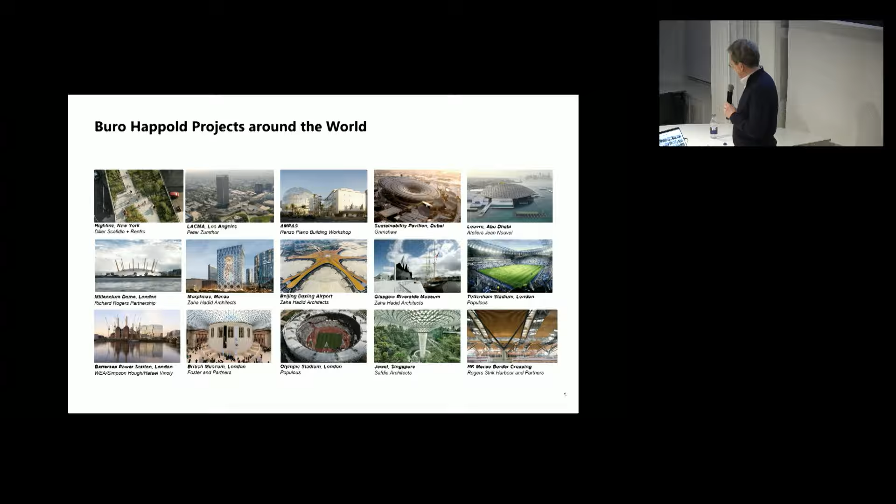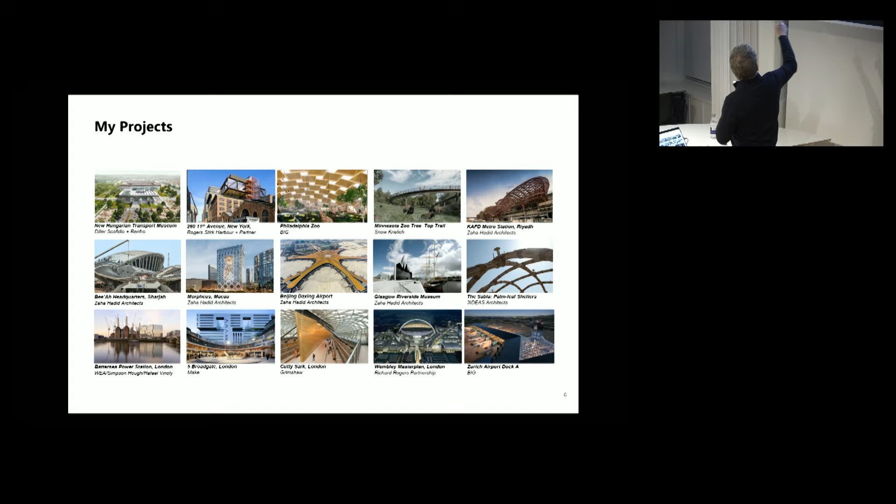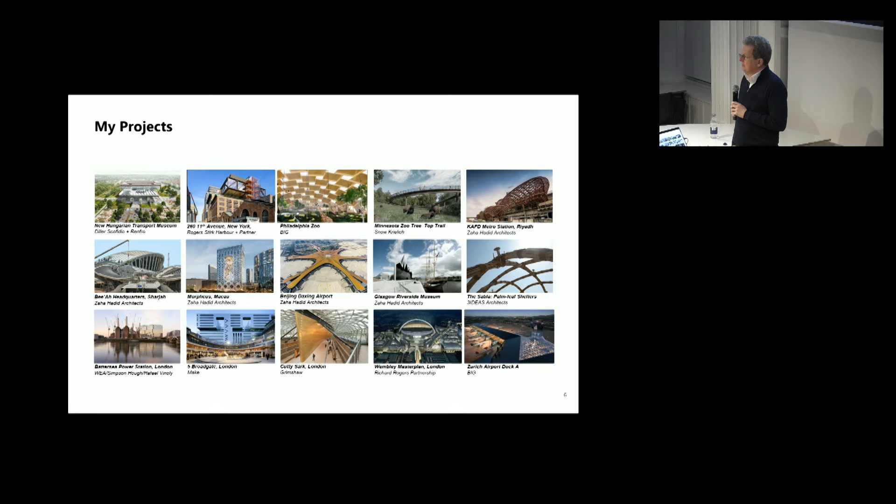We've left our footprint all over London. I've got a few pictures here. The British Museum over there, the Olympic Stadium, the Millennium Dome, and a few others. We've done pretty much every stadium here, Arsenal, Tottenham, for those who are interested in that sort of stuff. And some of those projects have also been mine. As a structural engineer, I've been working on the super complex stuff, many years with Zaha Hadid and her team all over the world. You can see here Morpheus and other things, a broad spectrum of things that have kept me always quite at the forefront of what's happening in engineering, where we're working with our clients and what's working and what's not working.

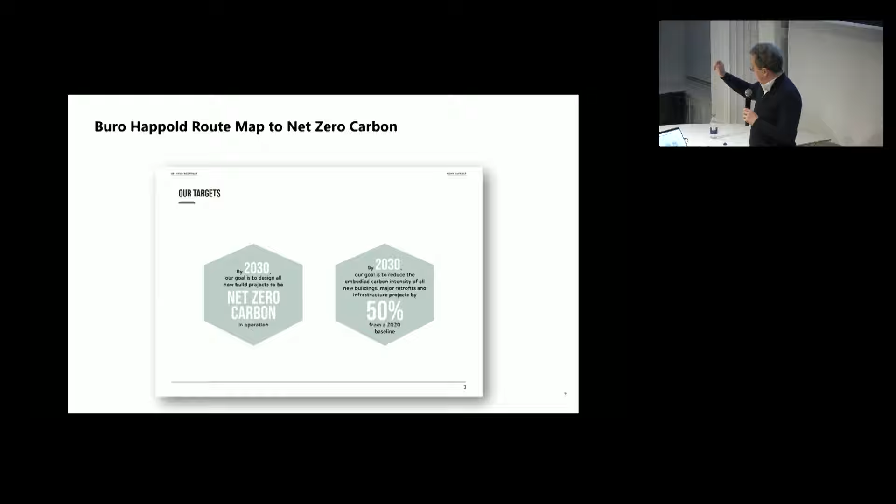But that was just really to position myself and our firm in this. What I really want to talk about is this whole big theme of climate emergency, climate change. And like all big design firms, you will have come across this across the world. We have our own targets around carbon emissions and sustainability. And our targets, you can see that here: 2030, all our projects to be net zero carbon. The interesting part here is also the net in the zero carbon.

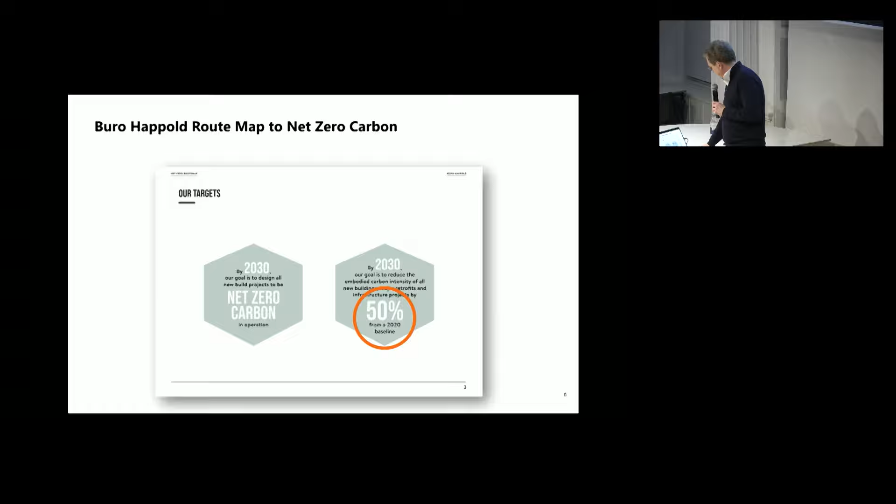But then the right-hand side, interesting here, 50% of the embodied carbon compared to baseline, because we do have a problem. And that problem in our industry, massively so, is materials. Materials, if you look at that, materials have embodied carbon and emissions throughout their entire life.

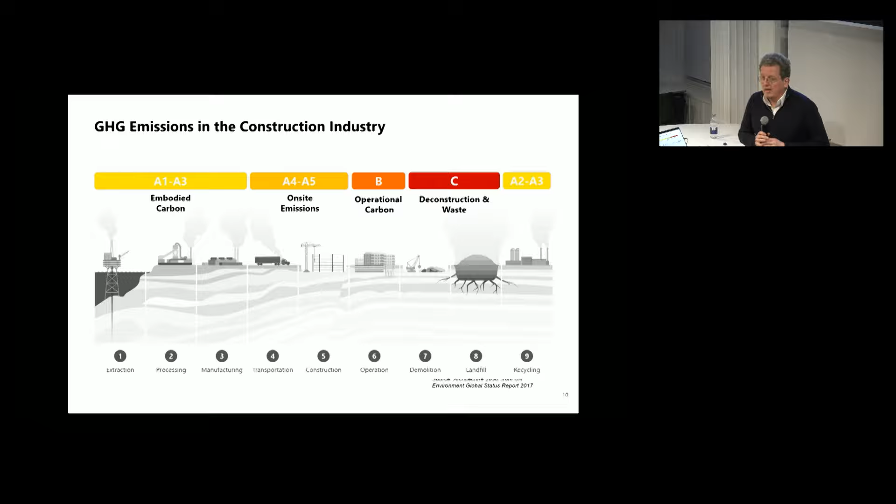We class this into these different steps, A1 to 5, B, C, and then the rest again, the recycling in the end if it happens. But at every stage, there are carbon emissions, and those carbon emissions are substantial. If you look at greenhouse gas emissions, to be more precise, in our sector, that's almost 40%. Building and using buildings, and I'm telling you nothing that you don't know yet. You have heard this all before, I'm pretty sure.

And if you then split this further, the big part here, 11, 12, 13%, numbers vary, are actually just materials and construction. So whatever we do has an enormous impact on the carbon balance or the greenhouse gas balance that we have. And over time, this has shifted. Over time, because we are able to reduce emissions in the running of our building through electrification, through green energy, and efficiency also in how we design our buildings for better operation.

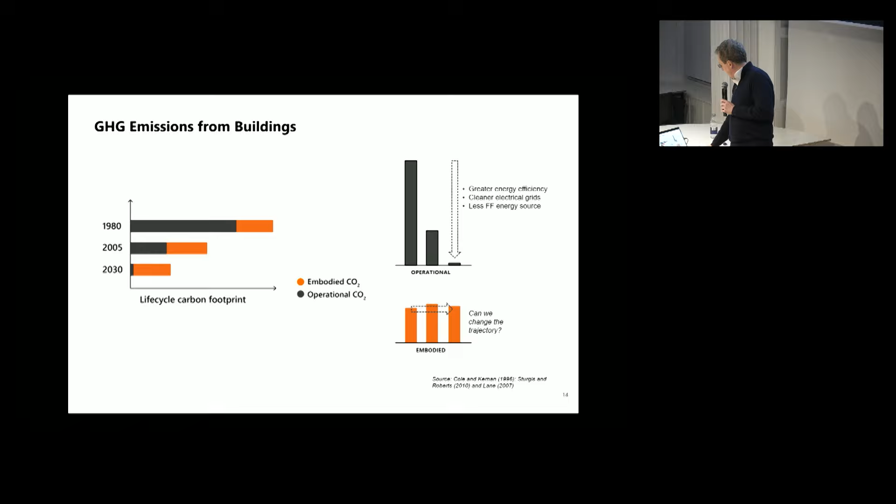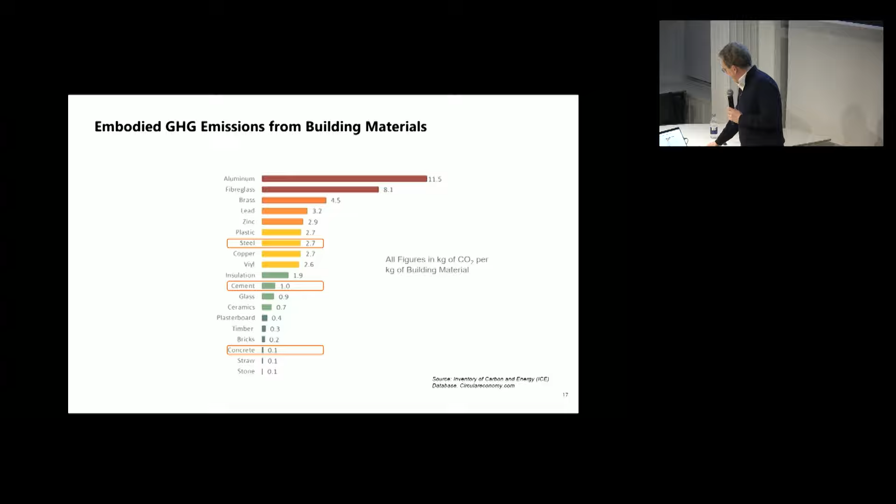If you look at just the standard materials we use all the time, steel, 2.7, concrete, cement, big number as well. But even timber, and I will show that in a moment, is not a zero carbon material. And so whatever we do, we have that problem of our materials being big carbon emitters. You've probably seen this, yeah? Most of it is to do with chemistry, not so much to do with energy.

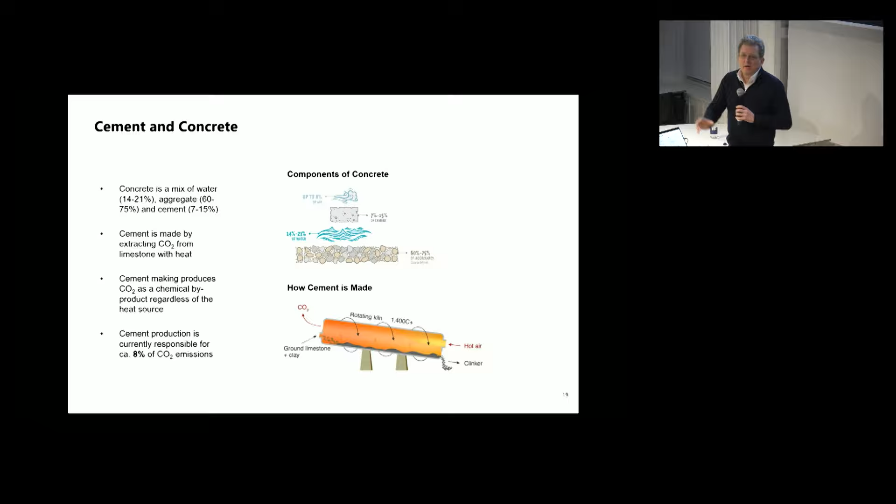So in the production of cement, we blast carbon dioxide out of limestone, and that gives us cement. Very simple terms. That happens at 1400 degrees, thereabouts, so not something that you can easily do with electric heating, so you have to gas fire it. And what you get out of this is the cement industry across the world is about 8% of global carbon emissions. Big chunk.

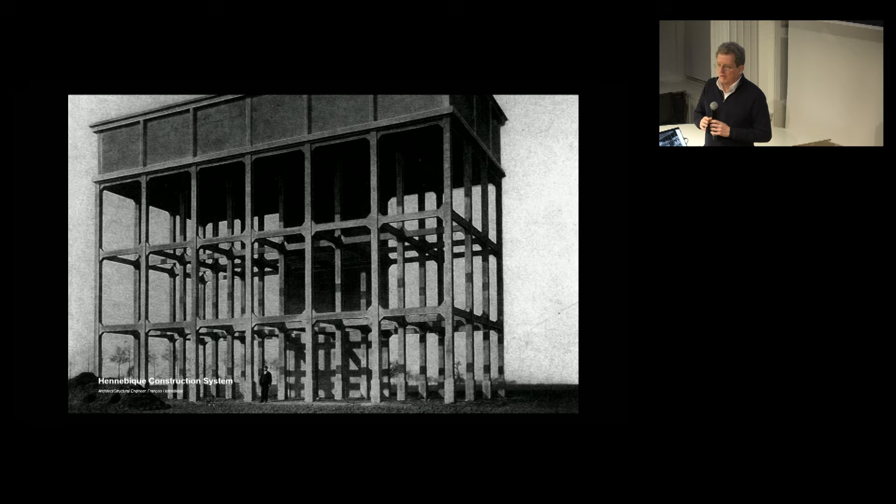But then cement as a material has been around for centuries, yeah? Concrete construction has its beginnings in the Pantheon in Rome, but then really took off at the beginning of the 20th century. This is Hennebique's structures in reinforced concrete, an entire typology, an entire tectonic logic developing out of concrete. And in a way, an absolutely fantastic material out of which you can build things that were previously not possible.

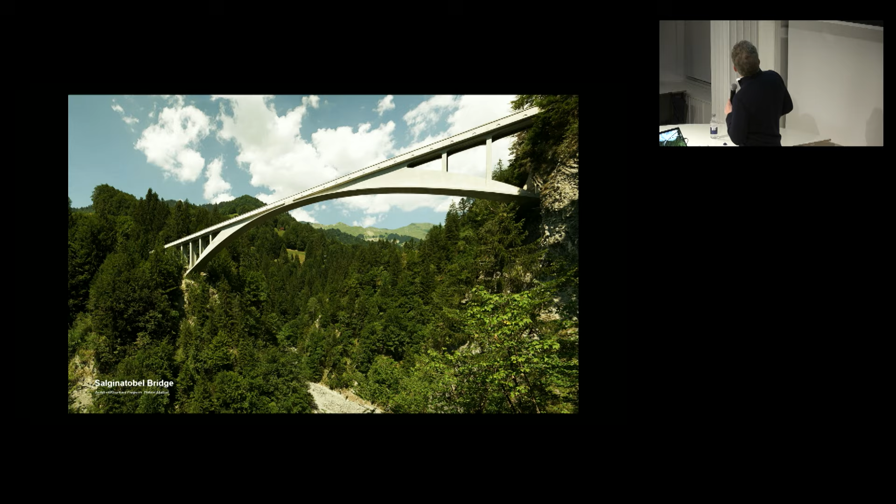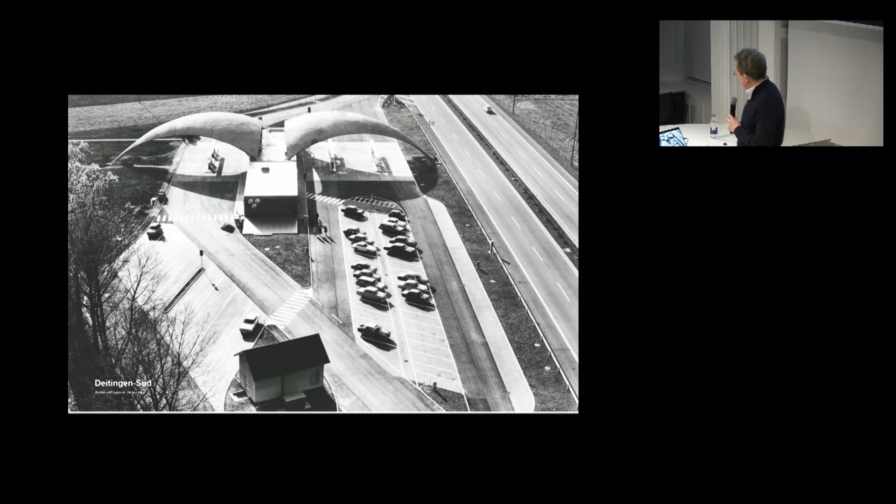And some masters of the use of that material emerged, like Robert Maillart, who knew exactly where to place material to get the optimum performance out of his bridges, and the aesthetics of those bridges matched their structural performance. And with that, a whole new aesthetic develops. Similarly, the structures of Heinz Isler or the Saarinen TWA terminal in New York. An entire aesthetic that was not possible before.

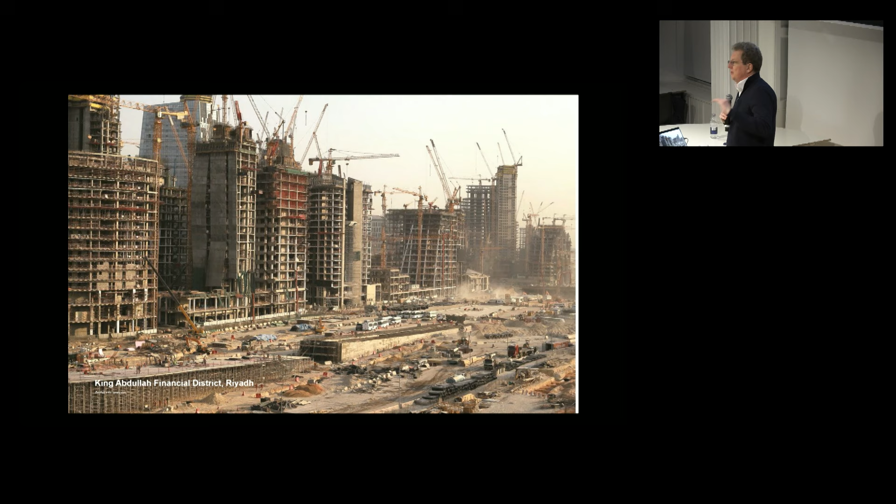Developing out of a material that is new and sparks off, I think that's my point here, an architectural quest for new form, creativity, and a look into a future of architecture that is quite different from what was there before. Needless to say, the primary use of concrete is this, enormous amounts just going into slabs being stacked, and that is the big issue, right? Huge volumes everywhere in the world.

We have a similar story with iron and steel, because there again, it's primarily a chemical issue. The chemistry of making iron is ripping oxygen out of ferrous oxide, and that is best done with carbon monoxide. You take that carbon monoxide and you let it react with the iron ore, and what you get is raw iron. In very, very simplistic terms. I'm not going to bore you with all the intricacies of the chemistry here, but that process needs a lot of heat and a lot of coal.

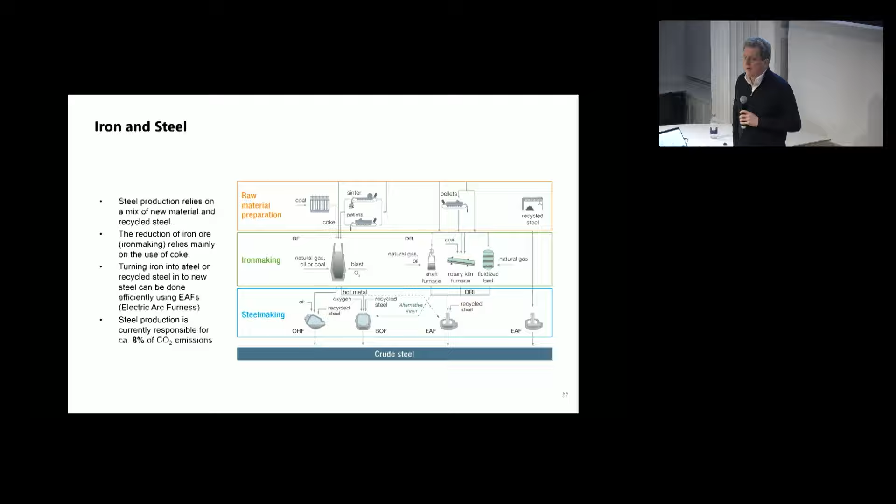There's some hope though, because you can make this process work with hydrogen. You could potentially, and there's tests that are running with this, do the reduction reaction, where you get the oxygen out of the ferrous oxide, with highly reactive hydrogen. But that only works properly if that hydrogen is produced in a sustainable manner. Because hydrogen, as we can buy it normally, is just taken from methane, where you take the CO2 out and you're left with the hydrogen, so you're not really getting anywhere.

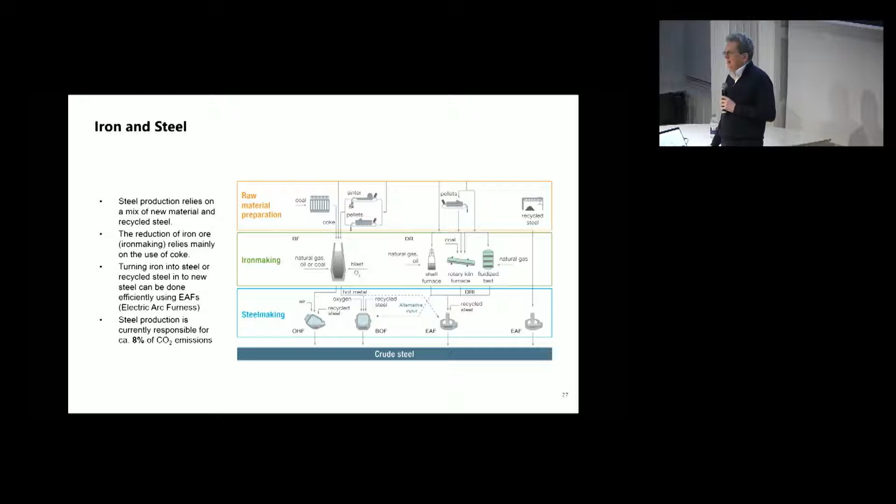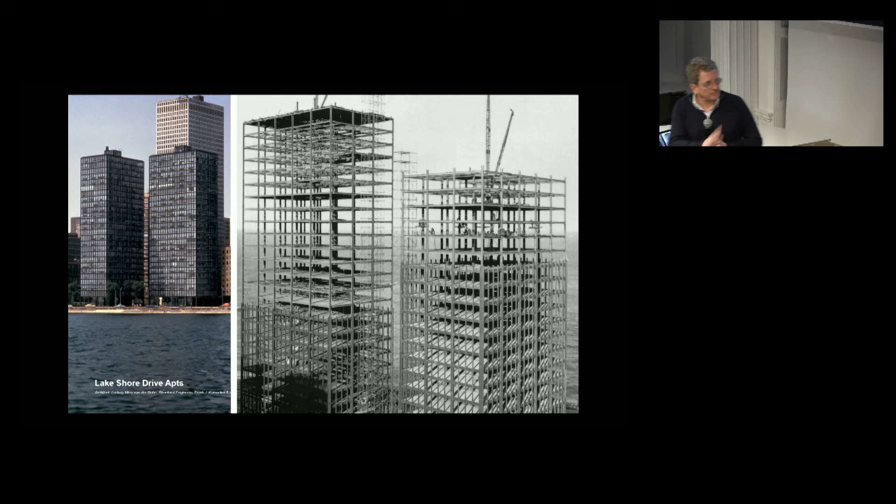And in all of this, the story is very similar. Steel is obviously not just construction. Cement is primarily construction, and is equally about 8% of global carbon emissions. But a similar story here: out of steel, out of the invention and research into the use of a new material, an entirely new architecture, an entirely new opportunity to build bigger, to build more ambitiously developed, which is quite fascinating. Here, 19th century, Frankfurt Station, or the extremely delicate structures of Mies van der Rohe's Lake Shore Drive apartments, or one of ours here down the road, the Millennium Dome.

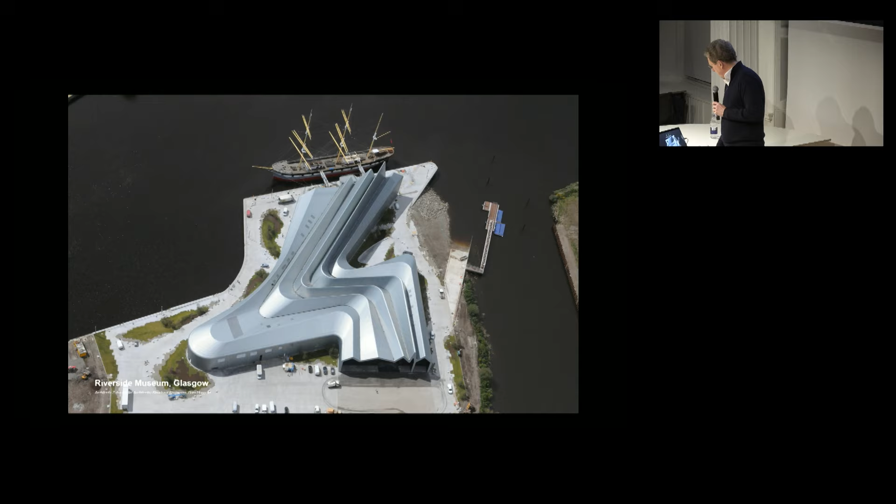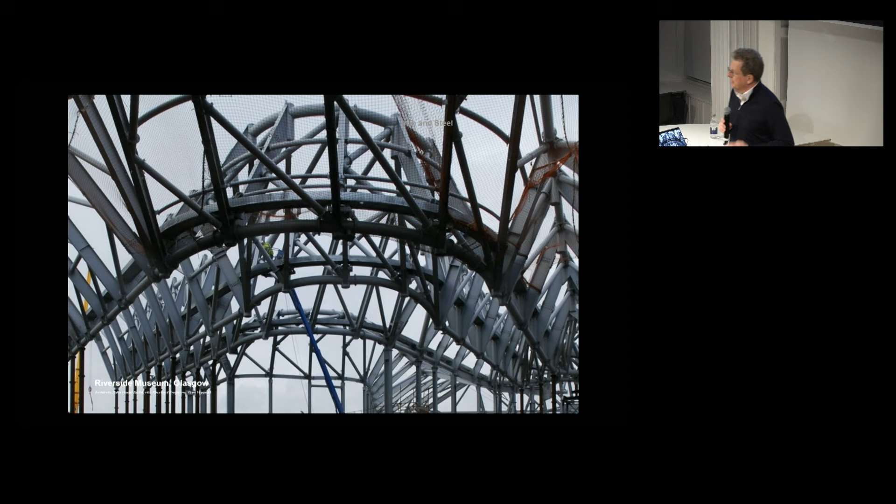Perfect example of what you can do if you master using a material. This is entirely built from steel, with the exception of the membrane, which is a glass fiber material. Or then this, one of mine, Zaha Hadid's Glasgow Riverside Museum. We use steel to create the most unbelievable form, because it is a fantastic material for this kind of thing. But then it comes at that cost that I just mentioned.

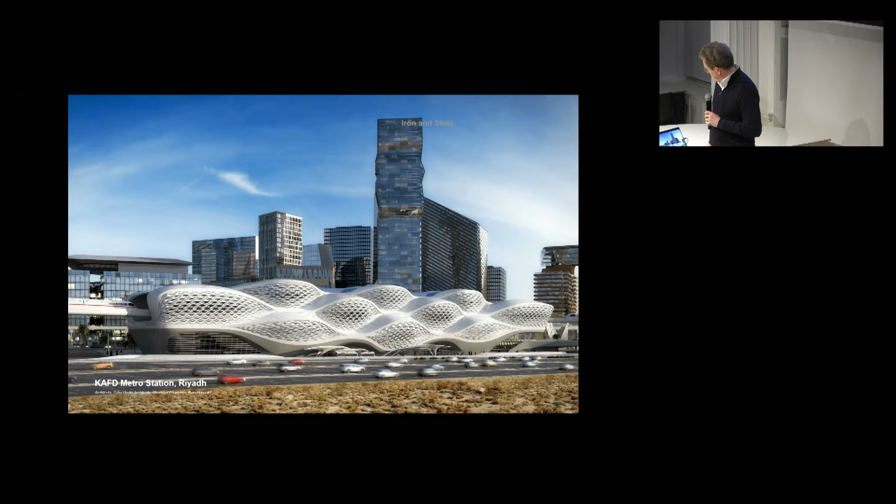Similarly, this, another one of mine, KAFD metro station, opened last year. That's what it looks like. That's how you create this form. And we need to ask ourselves, is this where it should go? Is this the way to use what I would say is a precious material? Precious not because it's so expensive in money terms, but because it's so expensive in emission terms.

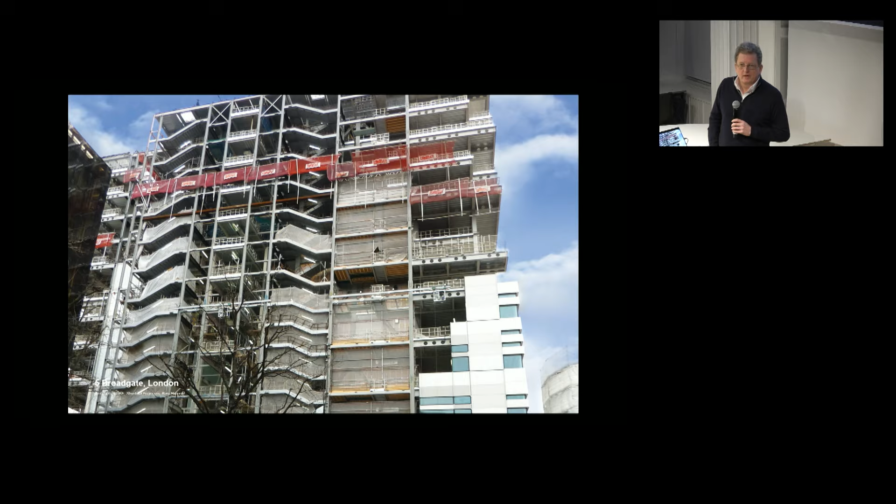And again, similar to concrete, in another one of mine here steelwork is used primarily to put floor plates one on top of the other. Big spans are possible with steelwork beams. We see that everywhere in the city. This was an interesting one, that project that I just showed you, because it was completed in 2012.

But in the run-up to this thing, between 2009 and 2012, we did a full carbon life cycle assessment. I had a guy in my office who had an absolute passion for this. He dug into all the early databases that he could find, getting these numbers that are now widely published everywhere, and did all this meticulously. British Land, the client that we worked with at the time, paid for us. They showed great foresight with this.

And then as the project was complete, I went to see their sustainability director and asked her whether we shouldn't do this on all projects, because we could actually demonstrate we could save some embodied carbon through clever interventions, the right design of the foundations or the right cladding material and so forth. And she said to me that was a bit of a non-story. No one's interested. Why would we do that? Well, fast forward 15, 20 years, and it is just the story. It's everywhere.

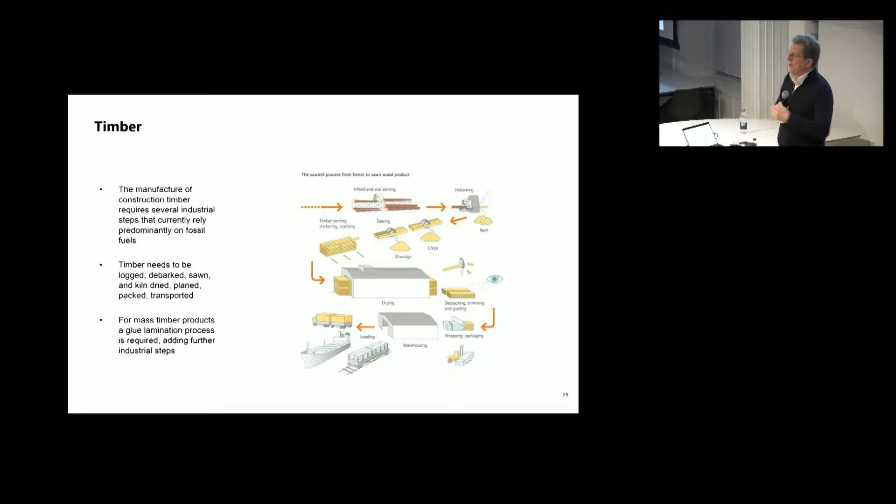And timber, I need to put in there as well as a material. I said it's not zero carbon, because even though timber is made from trees that grow by taking carbon out of the air and turning it into the fibrous material that is timber, what we're doing with it isn't really taking the tree and making it into a building. We're turning it into an industrial product. There's an enormous amount of cutting, kiln drying, preparing, gluing, and turning it into what is ultimately an industrial building material that has its own carbon impact. Much lower than steel or concrete, but still not the sort of zero carbon wonder material.

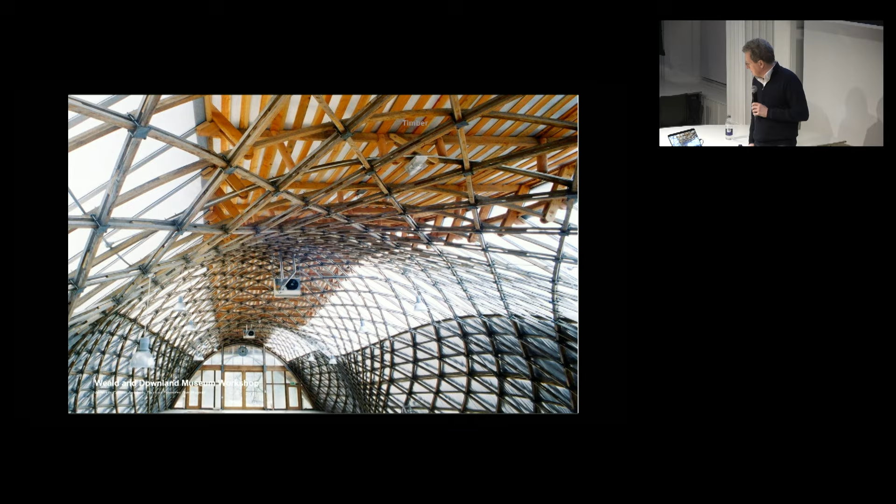And even with timber as an industrial material, fantastic architectural and structural forms emerged. This is one of those that really fascinates me. We were just talking about timber grid shells on the way over, because I went to a conference not so long ago, and there was lots of work being shown about tiny little timber grid shells, and I said, have a look at those, we built them years ago. Fascinating structures. But as you can see from this project, in most cases we turn timber into industrial building products. They are glue-laminated sections connected with steelwork connectors or something similar that create their own aesthetic, their own architectural expression, but are highly technical.

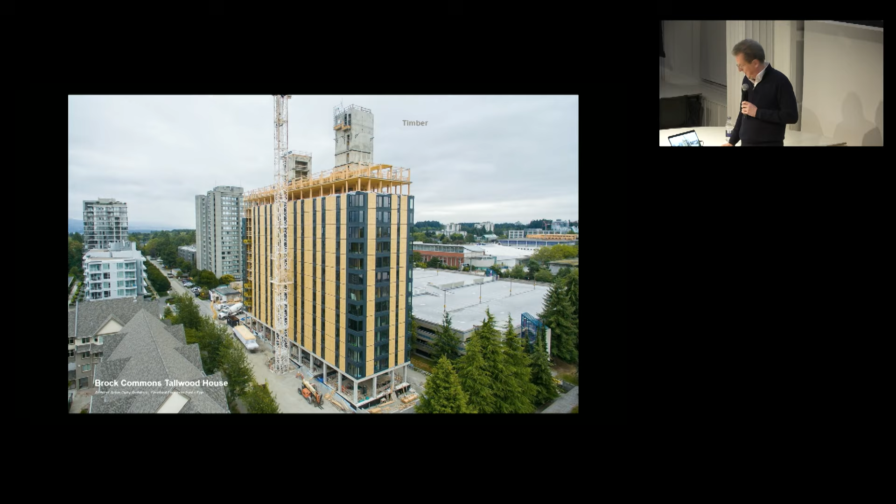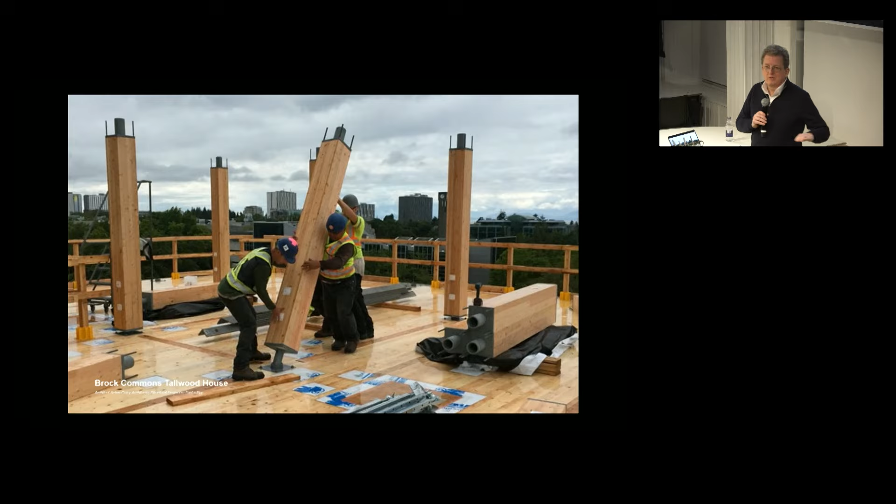And then the quest to turn timber, similar to steel and concrete, into a material that is easy to use for the development of multi-story buildings. Yeah, this one is a fascinating one. It's now a few years old, but it's literally using glue-laminated, cross-laminated timber. It's not one of ours, it's Fast + Epp, structural engineers for this, turning that into a material that can produce flat slabs. That is where we want to land, flat slabs on columns.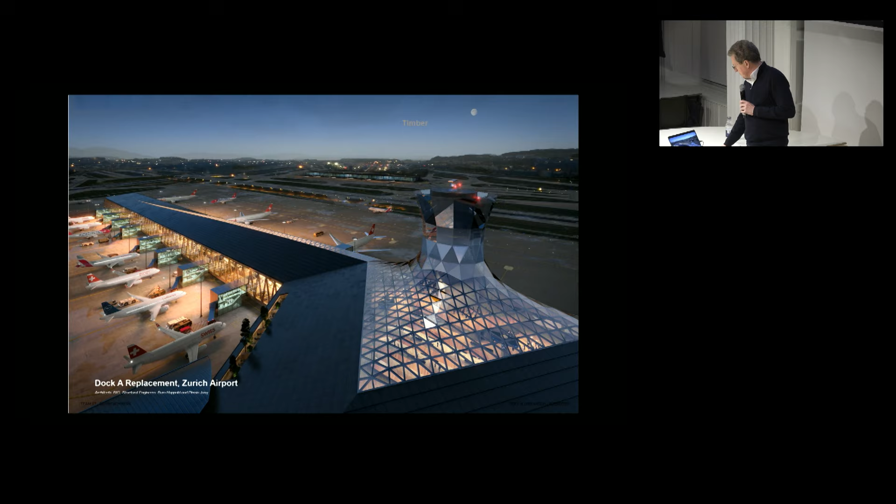And a recent one where timber is then taken to the sort of end game, basically. Make it as big as you can. Well, pardon the pun, it's with BIG architects. It is the new Dock A of Zurich Airport, an enormous timber structure. The entire building sits on a concrete plinth, but is then made from big laminated timber elements.

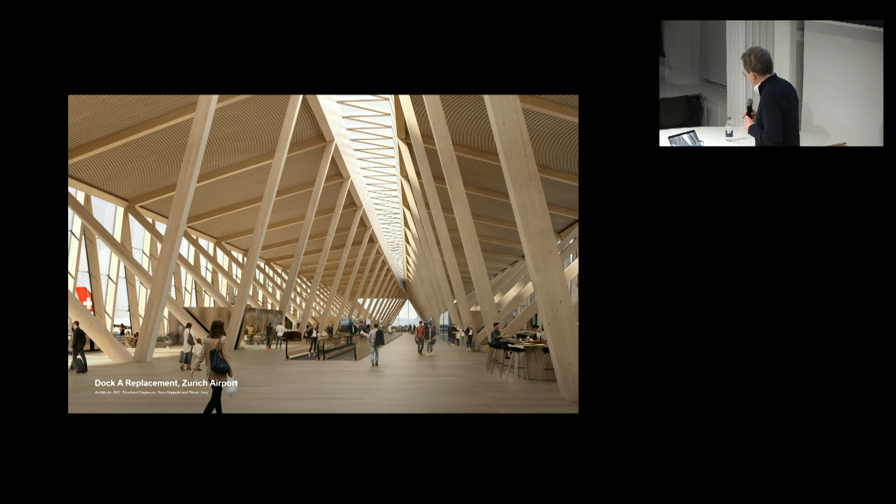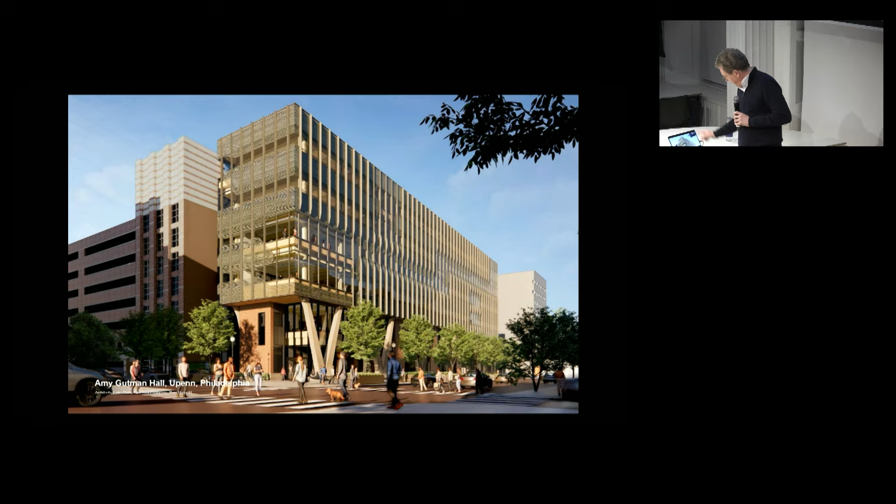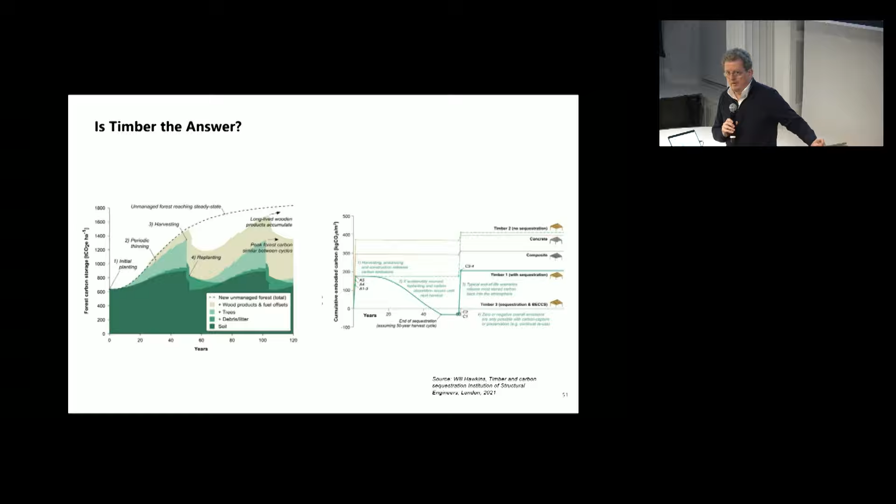But before we do, this is a study that one of my colleagues did, that we need to be absolutely mindful of if we build with timber, because it's the end of life that is critical here. If at the end of life we throw the timber into the landfill, then all the carbon that has been sequestered, pulled out of the air, is going to be put back into the atmosphere. And so timber can actually become quite a carbon-intensive material if we don't look at the entire life cycle, which is then a design challenge, because we don't want to throw our buildings away after 30 years or 50 years or whenever it is.

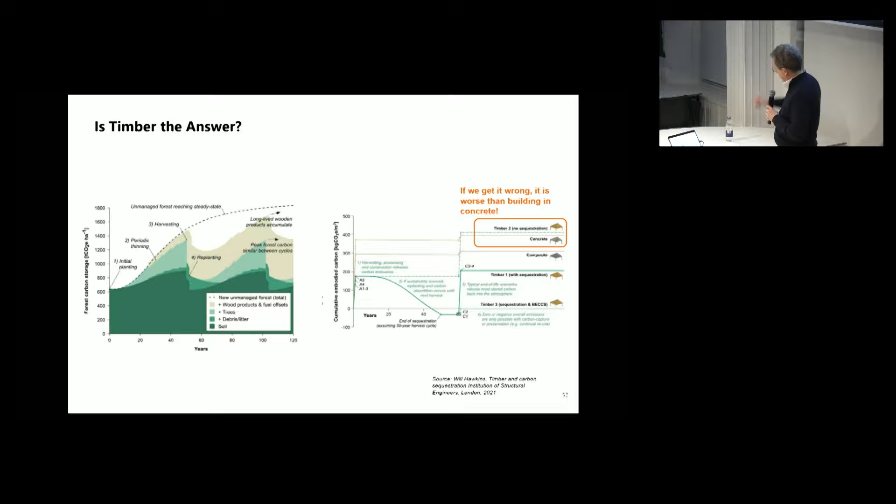This one here has been around for a while. But 5 Broadgate that I showed you earlier, the one where we did the embodied carbon analysis, for which we actually won a sustainability prize, it replaced 2 perfectly good buildings. They were just a little too small. So yes, here you can see how if you get it wrong, it's worse than building with concrete.

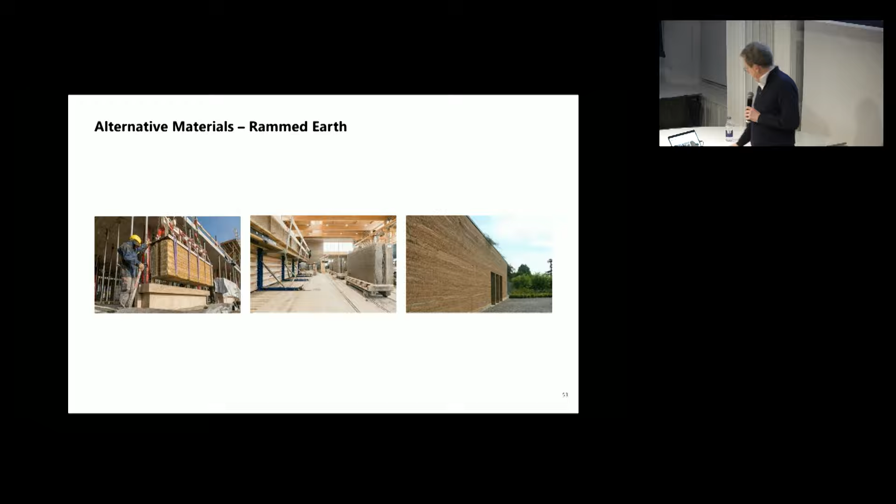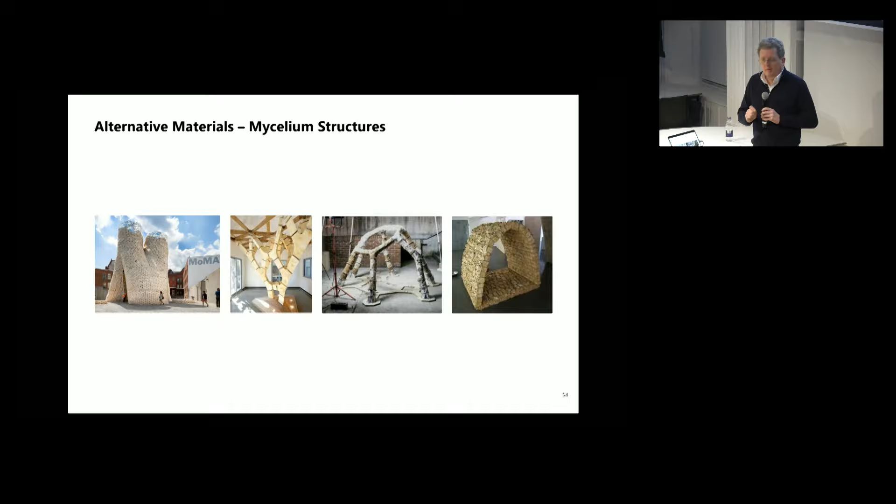And then one of those areas that I'm looking at with my students: what are the alternatives? Can we build with rammed earth? Can we actually do something that is as ambitious architecturally and as ambitious structurally if we build with rammed earth, or if we build with mushrooms? Not quite. We're not quite there yet. And that is where I'm saying we have a big problem. So we need to rethink how we design and how we build and what we build.

Everyone in our industry is talking about a whole life carbon vision. This is the UK Green Building Council. Everybody knows that this is a problem that we need to be engaging with. A whole lot of targets have been set, a whole lot of ideas have been set, and the key to it, so we believe, seems to be working in a circular economy, working with circularity, ensuring that we reuse our buildings, that we don't do what I just mentioned with the timber buildings that we throw away at the end of the life of a building. Otherwise, we will never get out of this.

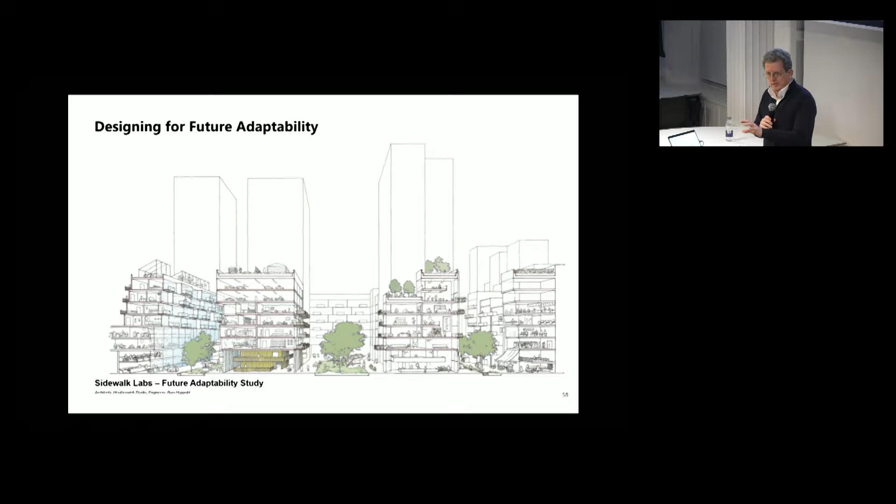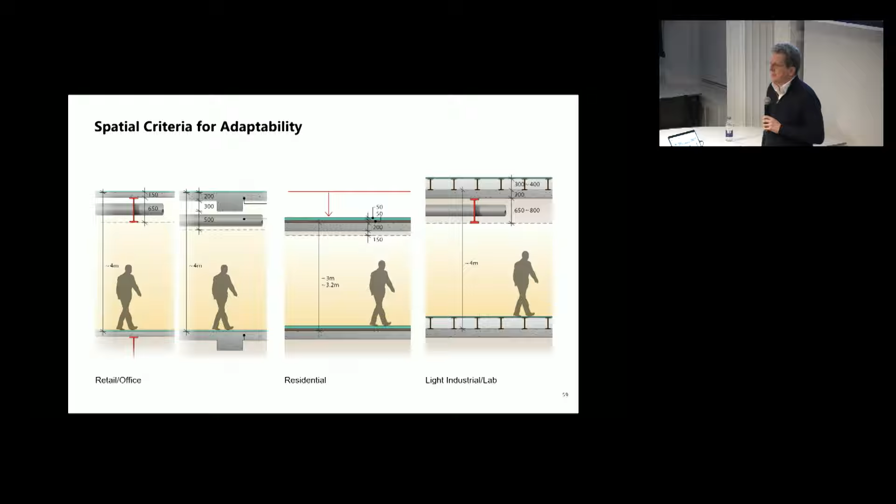That means we need to design for adaptability. There's a big challenge around that. Do we design something that is purpose-made for the use that we are designing it for now? Or are we using buildings in different ways over their lifespan? Can we adapt them to different usages? And if so, what does that mean? This is a study that I did many years ago for Sidewalk Labs, looking at what the geometrical constraints are. It's mainly about floor-to-ceiling heights, mainly about the space that you give to the user.

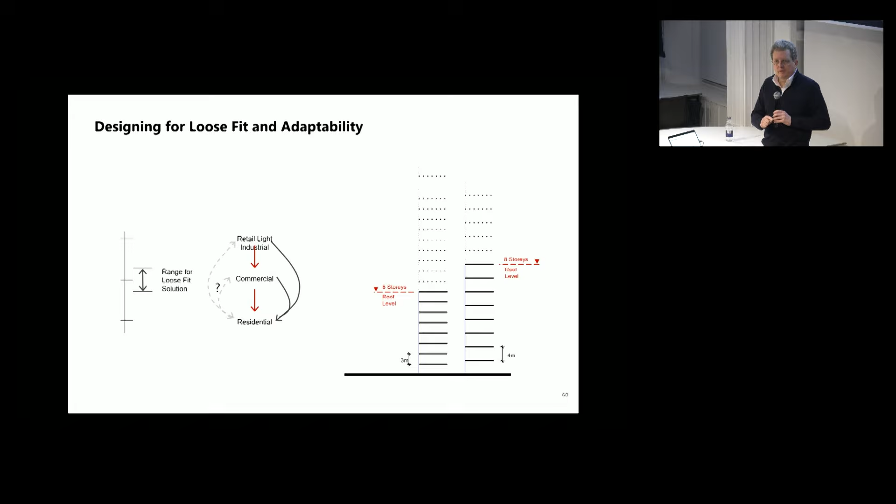And if it's residential, you can get away with 2.5 meters floor-to-ceiling. If you do an office building, you don't. So where's the sweet spot? Do you start building residential buildings with 3.5 meters floor to ceiling so you can transform them? Which way do you want to transform them? How do you get this, what I call loose fit, into the building that then allows you to do this kind of transformation strategy that can happen throughout the life of a building?

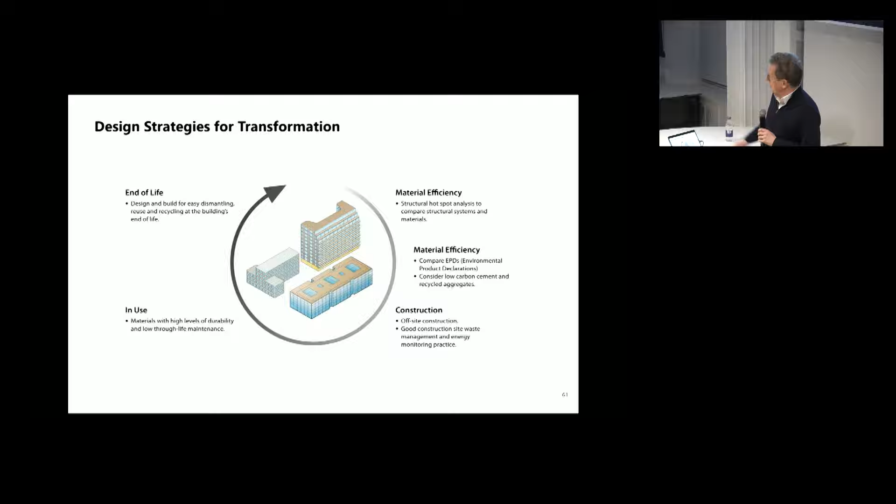In London, this has become the norm now, that we look at what do we do with existing buildings, what do we do with the transformation, or we call it adaptive reuse of existing buildings. This is JP Morgan's headquarters here. It's not quite as big as the one in New York, right? In Gresham Street in the city. And what we did here is we took the existing frame of a 1960s building and added 40% floor area. Without having to build in new foundations, we had to do some trickery in the foundations, but not having to build in new piles or anything.

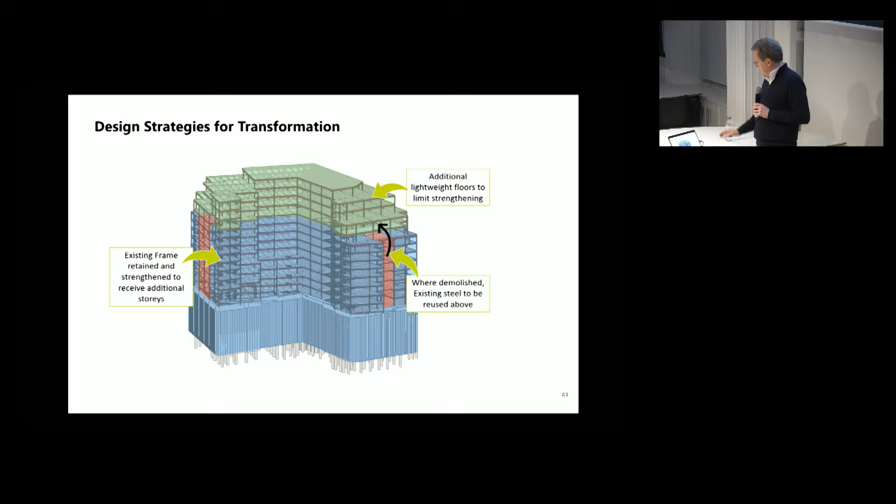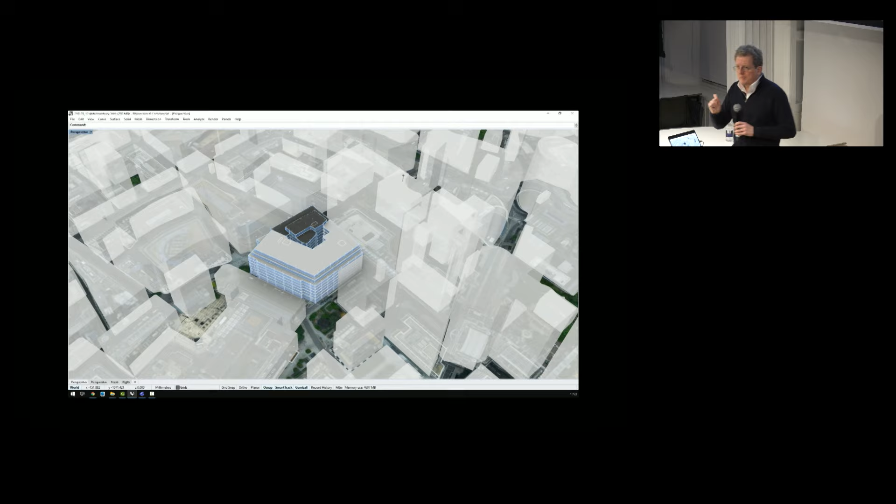And I think this is a video. We were able to do this in studies that allow us to offset loadings, to ensure that we understand exactly what the material capacities are, and then build as much as possible on top of an existing structure.

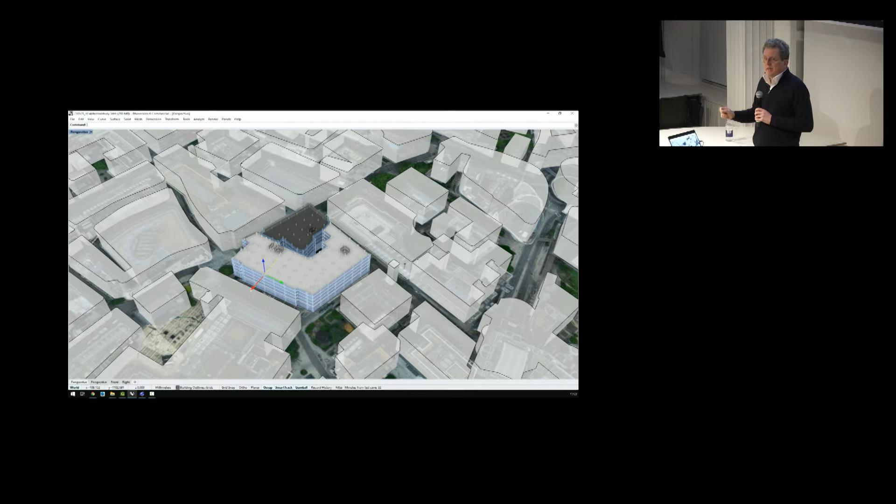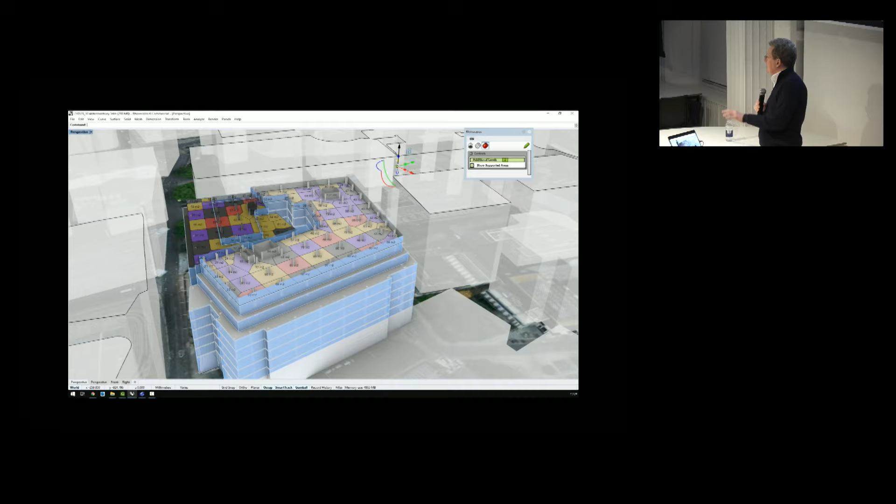We do this everywhere. We reuse materials, and the London boroughs are actually looking at us prioritizing reuse and adaptive reuse over demolition and new build, even if at times that doesn't make sense. There are examples where you're probably better off, even from a carbon point of view, if you demolish and rebuild, but there's a very good number of buildings where it makes absolute sense to do this.

But here's sort of how this plays out in numbers. If we look at a standard building in London, 6 to 8 stories now being built anywhere, we look at, in round numbers, 1,000 kilograms of embodied carbon per square meter. This is a round number. Some people say it's 850. Others, when you don't really look at the number, it's 1,200. So let's settle for a ton per square meter, and that's sort of easy to see.

The targets that people have set themselves, London boroughs or Land Securities, one of the big developers here in London, sit at 500 for 2030, right? 5 years from now. That's a steep target because, as you've seen, we don't quite know how to get there. And at the same time, half a ton is not zero, right? So we're still nowhere near where we actually need to be.

So a whole lot of work is going on, and we're quite connected to this, researching what can happen with materials, how we can take materials forward, zero concrete, zero steel. I mentioned some of those options already: producing iron using hydrogen, replacing cement with fly ash or with others. Actually, GGBS is a good one, because that comes out of the steel making process, and you only get it if you're actually making steel with coke. But that's a different story. So there's a whole load of stuff going on in the background.

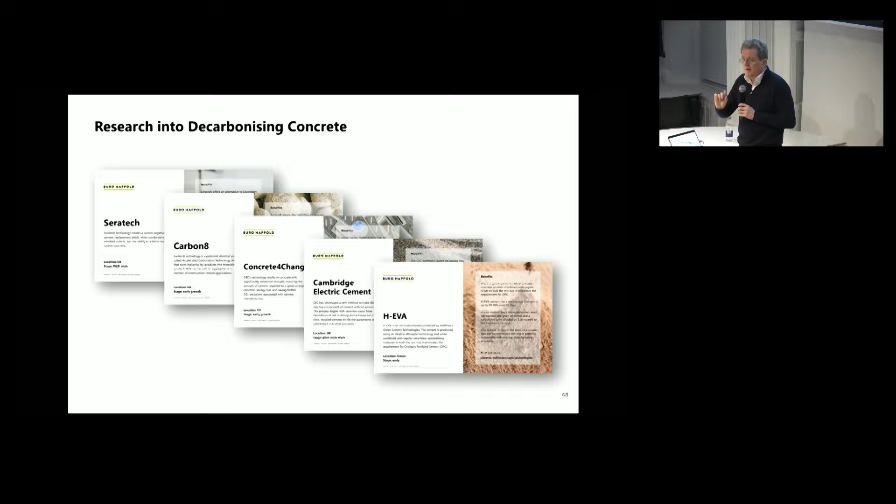None of them are at a point yet where it's scalable, because I think that's the key piece. The reason why the cement industry is an 8% contributor to global greenhouse gas emissions is the scale of the construction industry. It's enormous. I read somewhere that concrete is the second most used material after water or something. It's unbelievable. So any one of these kinds of things, they happen and they work, but on a laboratory scale or on a small scale; no one's yet moved that up to the next level, right?

Similarly with decarbonization of steel, a whole lot of progress has been made in electric arc furnaces. They're only there to make steel, not to make iron. So only for that last bit of the process, to take iron and make steel out of it, or to remelt steel that is recycled.

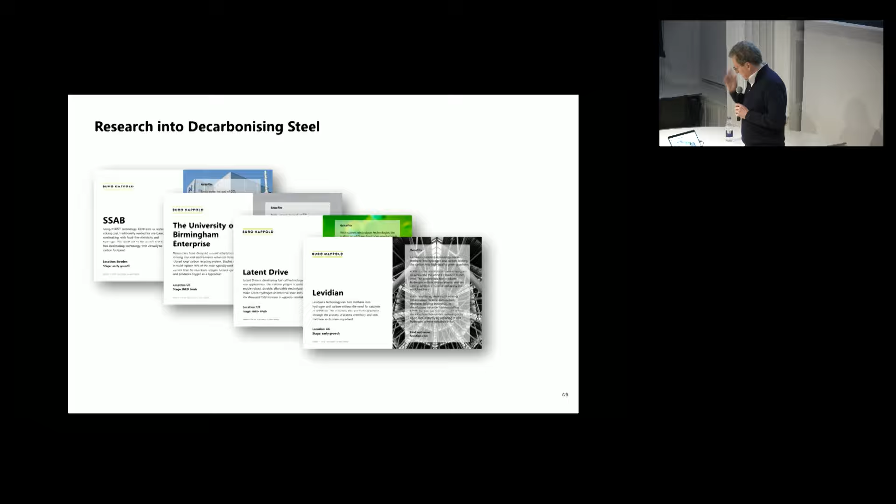But if you then look at the projections of construction material use in the world, it's not really going down, it's going up. So the projection of concrete use, that scale issue, is only growing. And it's shifting geographically, and I'm going to come to that in a moment.

And more interesting, a lot of the decarbonization is a bet on what I'm showing there in blue. This is from Holcim, one of the big cement producers. They're betting on the majority of the carbon being taken out of cement making through carbon capture and storage. That means you suck it out and you put it somewhere underground. Government is currently pledging billions for that. It's not a scalable alternative yet.

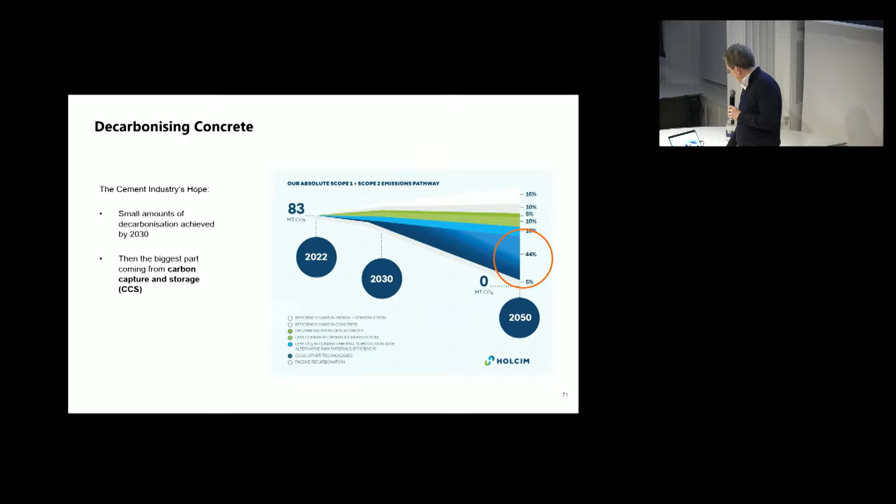And does it really make sense? We'll see. But you can see that big dip happens after 2030, so we keep business as usual, and then we move forward and we decarbonize with carbon capture and storage. I don't believe that story. I just don't believe it. And that's why I'm getting to the, have we got this right? Because in the background, we have another problem. And I've already alluded to that a little bit. We're not done yet.

We're 8 billion people, and by 2050, we will be 10 billion. The difference is 2 billion people. That is 200 times London to house them. That is massive. And that's not going to happen in London, well, somebody said the other day, it might happen in Yorkshire because of climate migration. But let's see whether Sheffield is going to grow to that sort of size. But it is about having to build housing, or basically cities, for another 2 billion people, for another 25% of the current population. That doesn't really help with the problem.

And if you then see that this growth isn't happening in an equally distributed way, but actually you have population shrinkage in places like North America and China and Europe, but massive growth in Southeast Asia and in Africa, you can see that we can't actually assume that we adaptive reuse ourselves out of the carbon crisis.

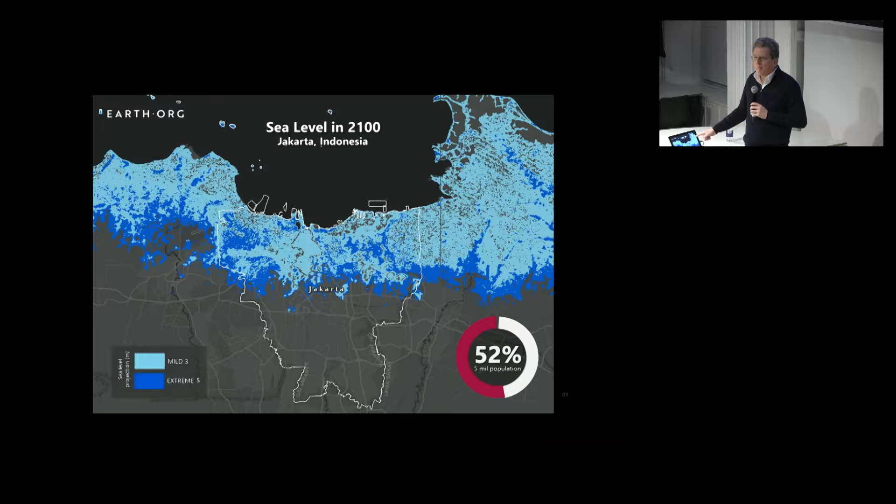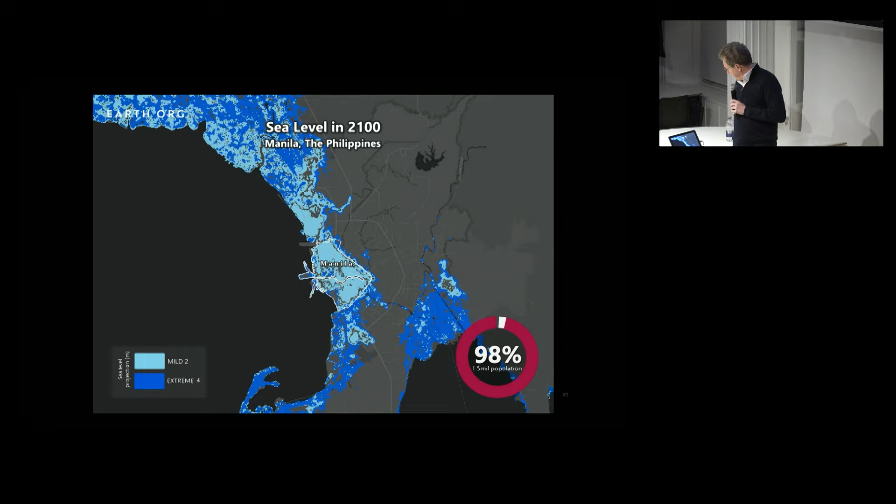And then the final thing, obvious, you all know about this, we all live in coastal areas, more or less. The majority of our big urban conurbations or urban metropolitan areas are coastal cities. And we sort of think, yeah, it's going to happen somewhere in Jakarta. Jakarta is actually being moved. So the Indonesian government is actually trying to move this capital somewhere else because Jakarta is at such risk of flooding that they want to prevent this or preempt this. Manila, Bangkok, Dubai.

And then I looked at the net and had a Google into what does climate resilient architecture look like? And you get this sort of stuff. That's everywhere, right? Stefano Boeri, love him, nice guy, right? His Bosco Verticale. Really? You stick trees onto it and that's climate resilience? But that's the pictures that you get. And I Googled that yesterday, so it's not something that has changed massively. I compared it with the last time I did a similar lecture in this room, and the pictures still look the same. So we haven't moved on at all either.

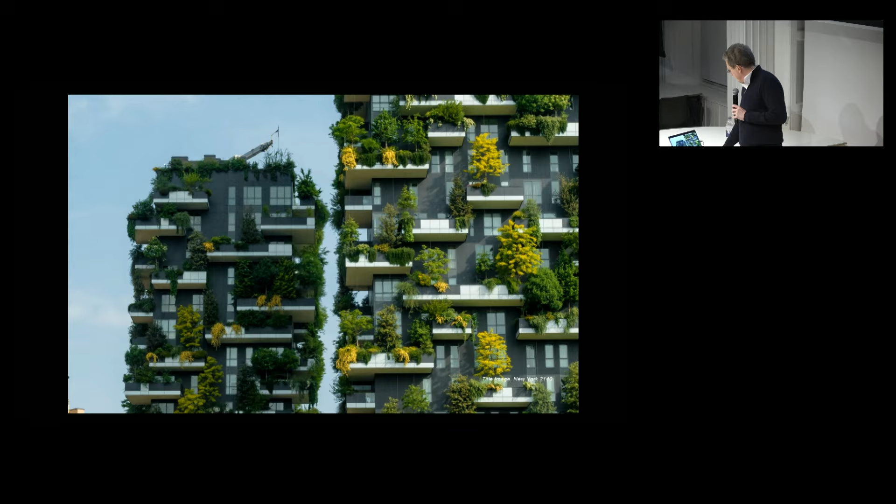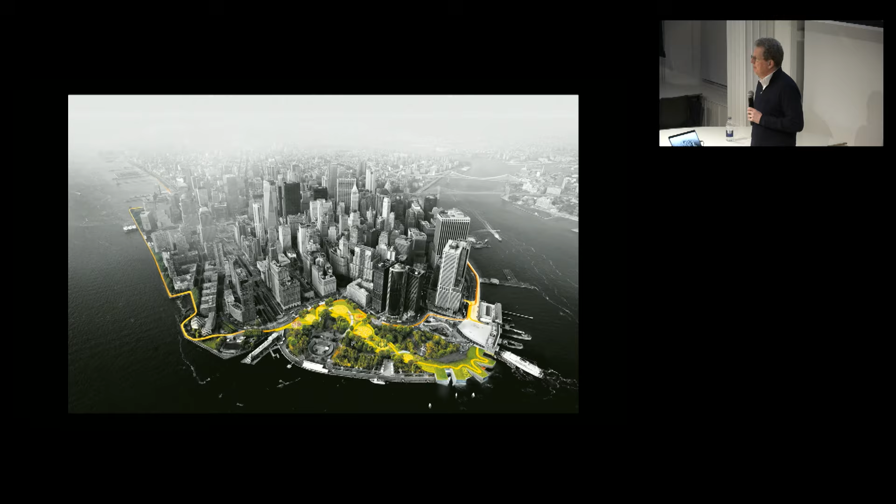The planet doesn't care, right? The planet will sort of scratch an itch. It's going to be sort of bad for a while, but give it 2 million years and it'll recover. So it's not about the planet at all. It's about us, about humans on this planet. And we as architects and designers and engineers have an enormous challenge, an enormous responsibility, but I think at the same time also something that is quite fascinating, because we are at that point where we have to reinvent it. So, how can I say? Good luck, have fun, enjoy it. I'm happy to be part of that journey as long as I can, but we have to completely rethink. Thank you.

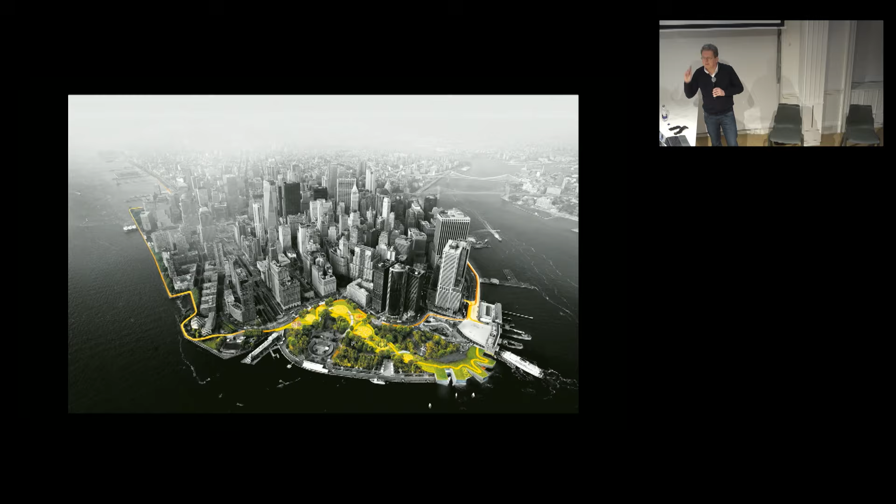Yeah, exactly. I think what I want to ask is, in your perspective and experience, what should the future be like?

No, I'm telling you, I think this is my key point. Thanks, Mike. It is exactly that. I'm telling you, it is your future to shape. So do not come to me and ask me what the future is. Work with me and develop that future together. That's what I'm trying to say. Just because I'm the professor somewhere doesn't mean I have the answer. No, forget it. That's not it.

This is a design challenge that is way beyond anything that we've seen before. But there are examples in history where massive design challenges have been dealt with creativity and foresight, with incredible outcomes. Read Mike's book, to do with climate issues. Cities have come and gone because of climate issues, changing crop patterns and the inability to feed the people that live there. And quite often they're stunning.